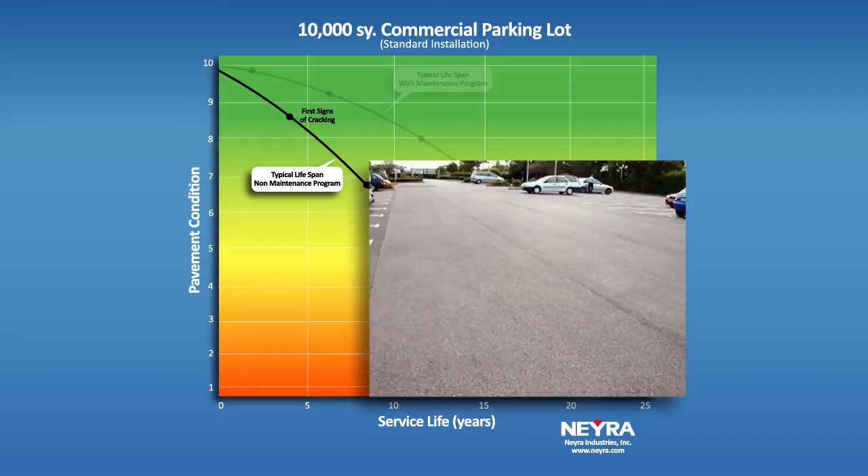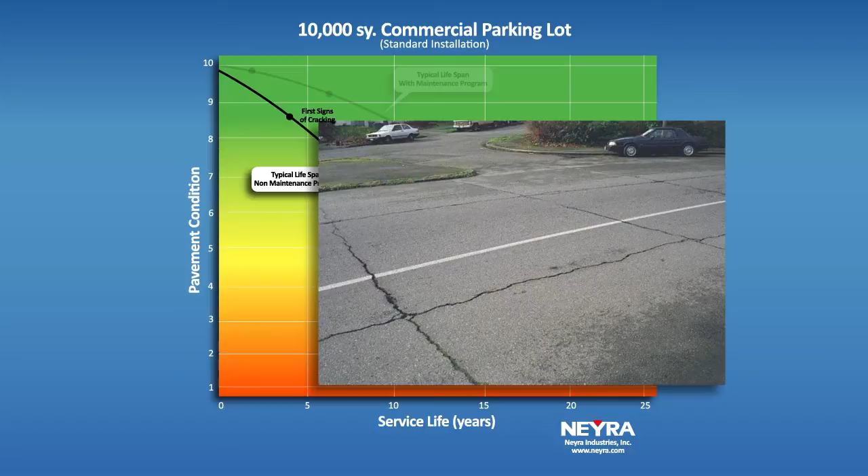As soon as the new asphalt is laid, it starts to deteriorate, losing oils and resins to oxidation, and other elements such as weather and contaminants such as oils, gas, and vehicular traffic. Within the first 2 years or so, you will notice cracking. This usually occurs in the seams and the joints of the parking lot. Untreated, these cracks widen and lengthen, transverse and longitudinally intersecting, and eventually form block cracking around year 4.

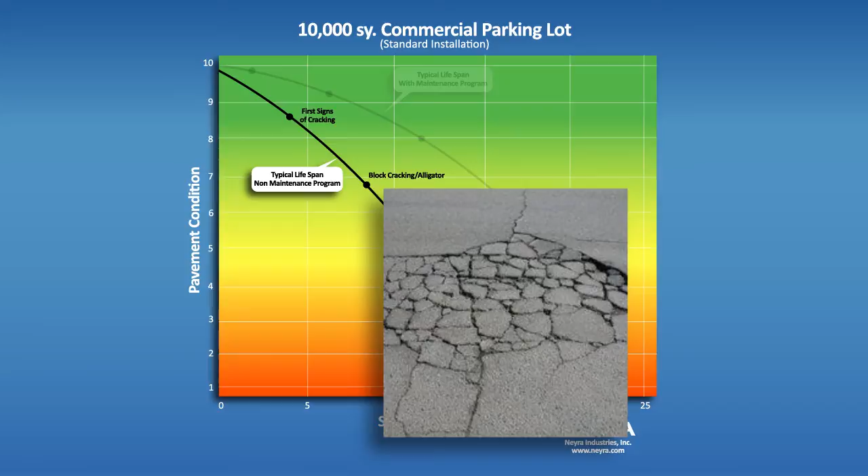As the elements continue to batter the pavement, the untreated cracks and block cracking allow water to penetrate to the subgrade, softening the base and forming cavities beneath. As vehicular traffic puts stress on these areas, the block cracks turn into alligatored areas. Around year 6 to 8, the alligatored areas, in part due to freeze-thaw cycle, are now turning into potholes. Small initially, but quickly growing with every passing year.

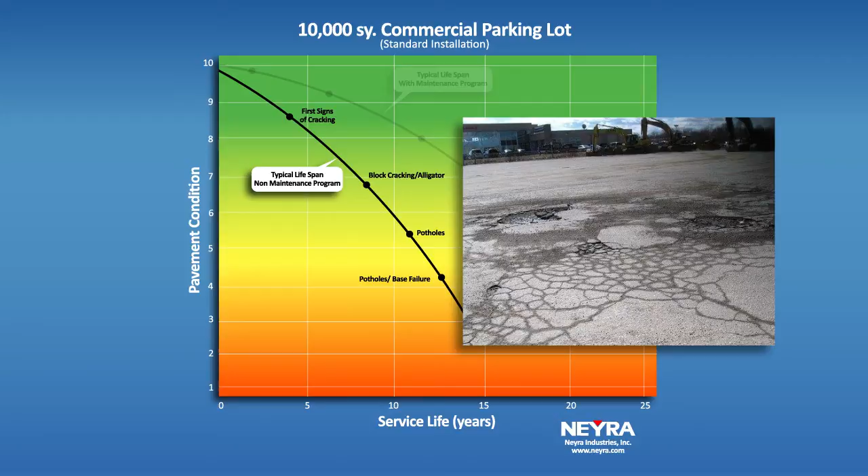Around year 14 to 15, the unmaintained lot has become a hazard. This generally requires full depth repair, surface milling, and reconstruction, with an average cost of about $198,000, or $20 per square yard for a 10,000 square yard parking lot.

Now, let's discuss the difference a maintenance program makes in the life cycle of your parking lot. 12 months after initial installation, we recommend seal coating the parking lot using a 2-coat application of a coal tar or asphalt emulsion sealer. This will secure the oils and resins and also lock in the sand surrounding the aggregate, further strengthening the surface. The cost associated for the first seal coating is an average of $9,000 or 90 cents per square yard.

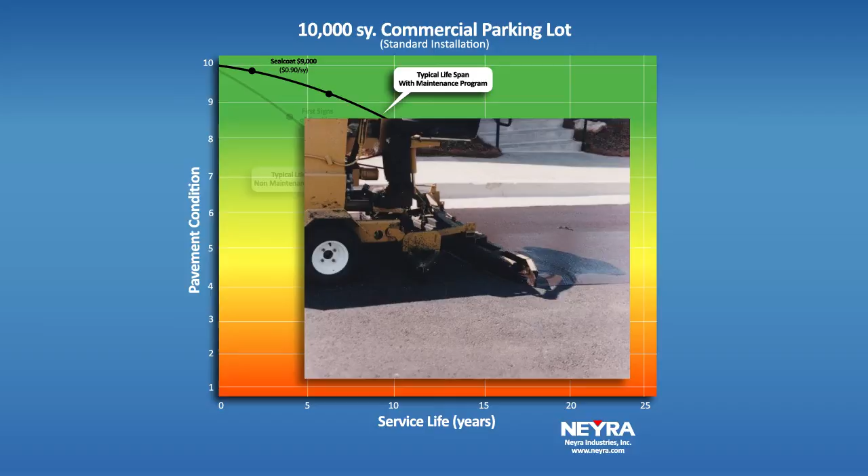The frequency on which you seal coat your parking lot will vary depending on elements such as weather conditions, vehicular traffic, equivalent single axle loads, and overall use of the parking lot. For instance, sealer will wear more quickly at a McDonald's versus, say, a florist shop due to the frequency of use. For example, you may have 500 cars per day at McDonald's and only 20 cars per day at the florist shop.

Typically, you will want to seal coat your lot again at years 3 to 5. In addition to seal coating, you will need to fill the various cracks in the pavement to prevent water from penetrating to the subbase. This project will have an average cost of about $10,500 or $1.05 per square yard.

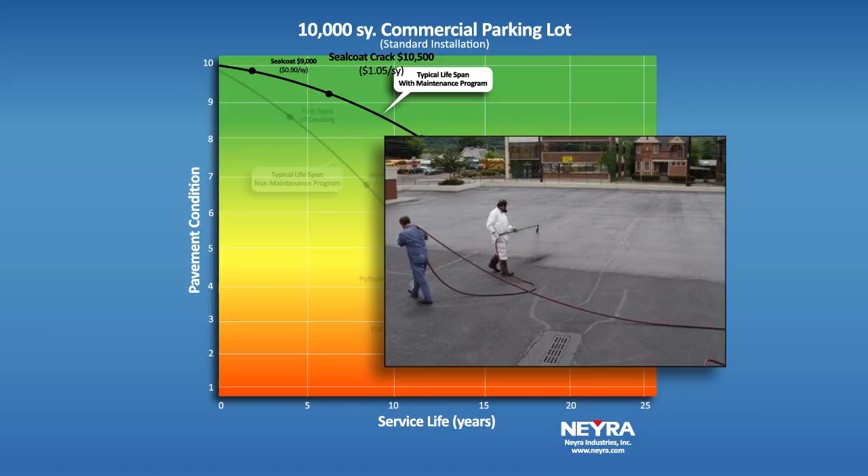At year 8 to 10, you will notice increased cracking and minor alligatoring. At this stage, the specification will require seal coating, crack filling, and 2 to 4 inches of surface patching, with an average cost of $15,000 or $1.50 per square yard.

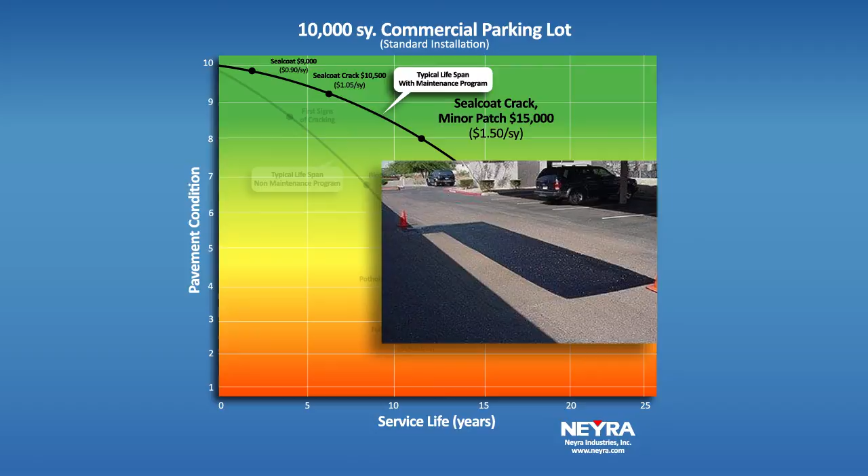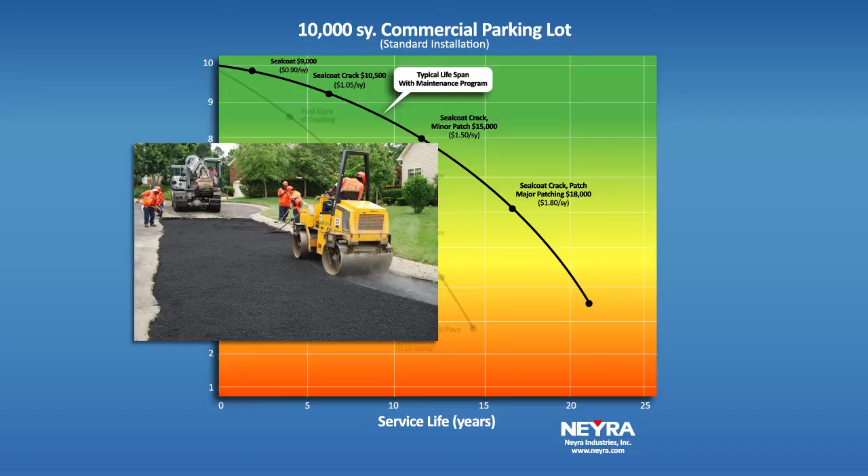Moving to around years 15 to 17, you will notice more alligatored areas forming as the asphalt continues to break down, causing widespread areas of repair. Here, major patching along with seal coating and crack filling will be required, with an average cost of $18,000 or $1.80 per square yard.

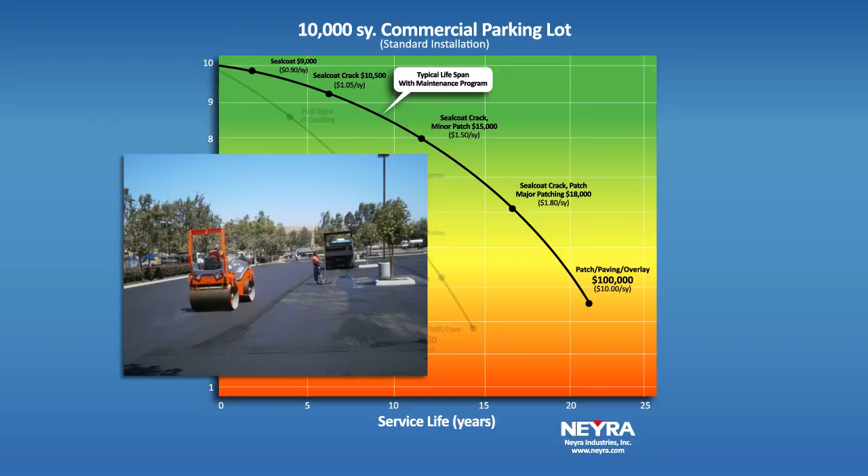At the end of the well-maintained parking lot's life cycle, around years 22 to 24 on average, is when you will need to replace it. Having properly cared for the lot, you have more economical options. Typically, you will be able to patch and resurface or overlay the parking lot in lieu of full-depth reconstruction. However, areas of surface milling will occasionally be required. This process has an average cost of $100,000 to $110,000, or $10 to $11 per square yard.

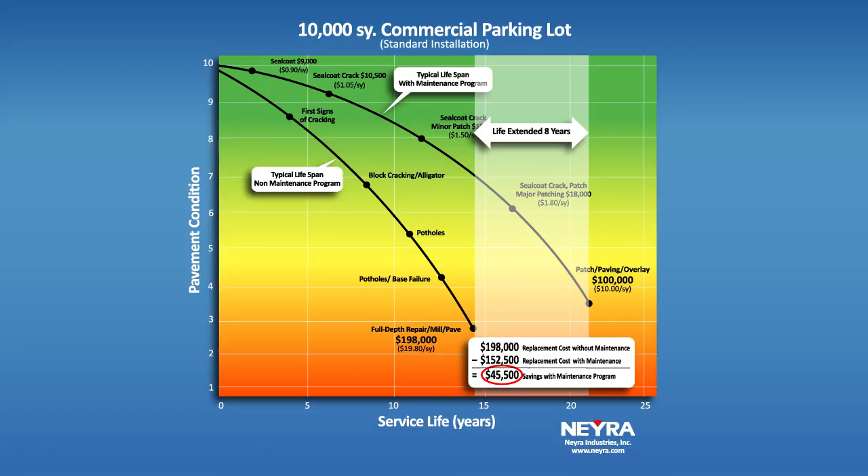Comparing the two, you can see that you save an average of $45,000 with a cohesive maintenance program. But let's look at this further. Along with saving money, you also extend the life of the parking lot by 8 years. In addition, you are also providing a safe, non-hazardous parking lot for tenants and customers that is aesthetically pleasing. The benefits of a maintenance program clearly outweigh the alternative.